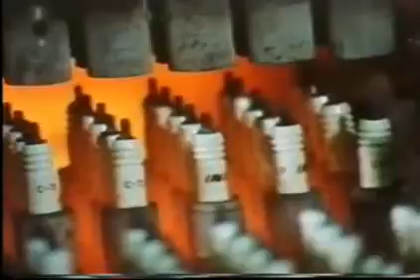The manufacture of parts by sintering powder compacts is one of the fastest growing production methods in the industrial world today. It offers unique advantages in economic shape forming and is applicable to virtually any material derived from a mineral source which can be prepared in a free-flowing form. Such materials include metals, metallic oxides, carbon, clays and glass.

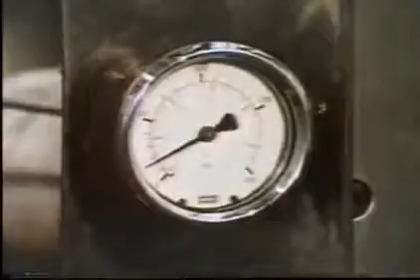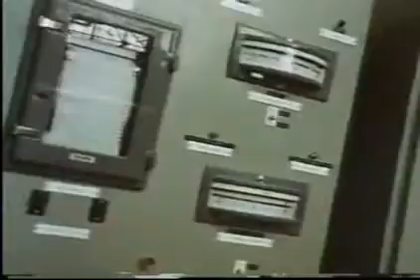Powder compaction is probably the most critical part of the process, since this is what determines the form, dimensions and quality of the fired component. No matter how precisely the firing cycle may be controlled, the kiln cannot produce a good sintered part from a poorly compacted powder blank.

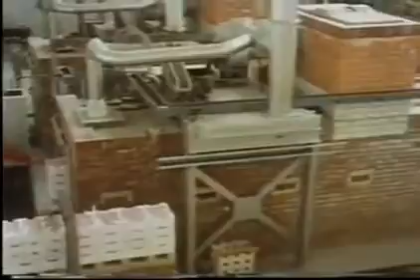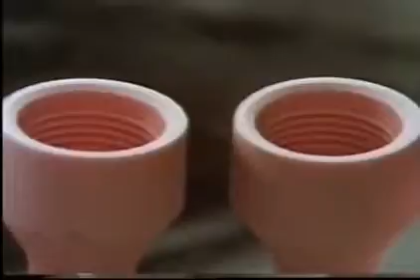Isostatic pressing techniques are now widely used to produce complex parts of more even consistency and density than are possible by other conventional methods. Isostatic pressing permits accurate formation of internal shapes, both plain and complex. It can reduce the need for drilling or turning and save valuable material.

The easiest way to explain isostatic pressing is to take the example of a bathysphere deep down in the ocean. Water pushes it with enormous force from all directions at once. An isostatic press reproduces the conditions found several thousand feet below the surface of the ocean in compressing any object placed within it. In this case, the hydraulic pressure is generated by pumps and so can be accurately controlled.

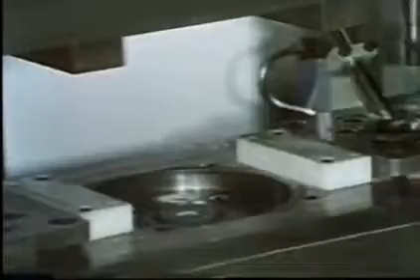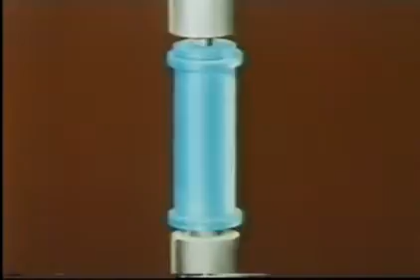Dry bag pressing has developed the isostatic principle for high output production. Essentially, this has been achieved by using a tool set which consists of matching steel and flexible components. This is in fact a custom-made tool set and pressure chamber for a particular compact. When sealed inside a pressure vessel, the tool set becomes an integral part of the system.

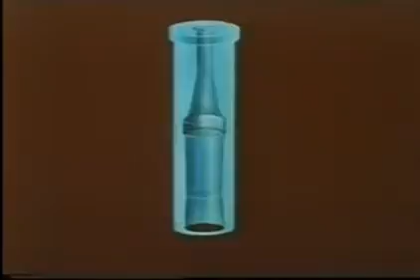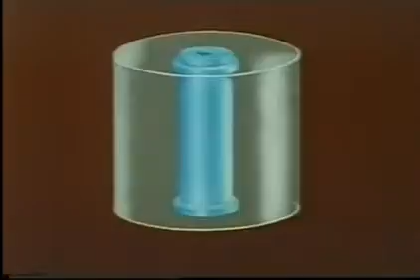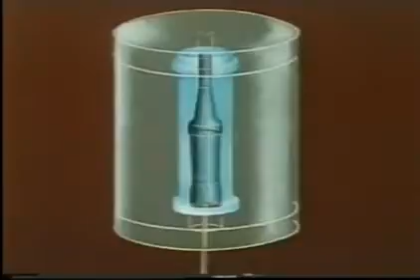At the center of the isostatic pressure vessel is the preformed flexible mold. It's designed to form a blank or piece part. A membrane is used to keep the flexible mold dry, and this assembly is contained within the pressure vessel. Top and bottom sealing caps in the form of the tooling are positioned to retain the mold assembly securely in the vertical plane. A pre-machined mandrel may be inserted where a compacted part requires an accurate bore form.

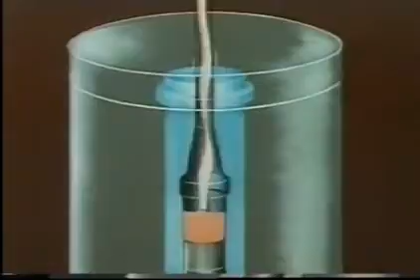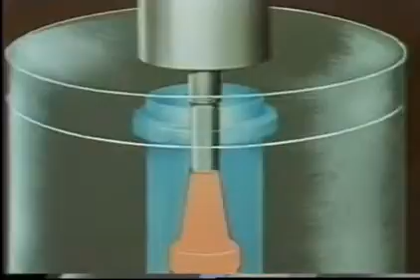A measured amount of powder is fed into the cavity over the mandrel. When the cavity has been filled, the top tooling comes into place to seal it. Fluid is pumped around the flexible mold assembly and is pressurized. As the pressure increases, the loose powder is compacted into a solid shape. The amount of compaction depends on how much pressure is applied and the type of powder used.

After a few moments, the pressure is released in a controlled manner. This speed of decompression is changed to suit different materials and compacted shapes. The loose, free-flowing powder is now a solid-shaped compact with a uniform density throughout.

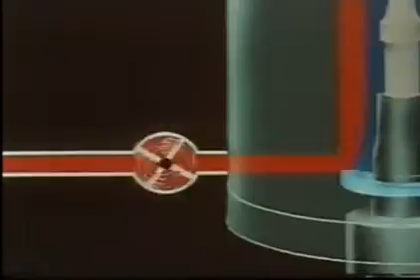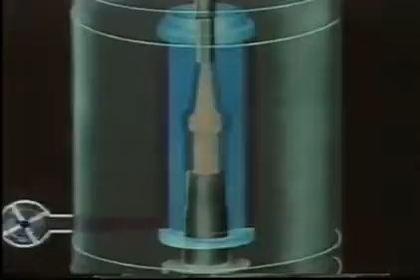Let's look at that again. The pressure is built up, allowed to dwell if necessary, and then carefully decompressed. The flexible mold moves away from the compacted part and resumes its original shape, ready for the next cycle. When the pressure is zero and the bag has totally regained its shape, the compact can be removed.

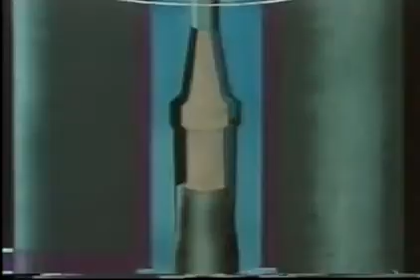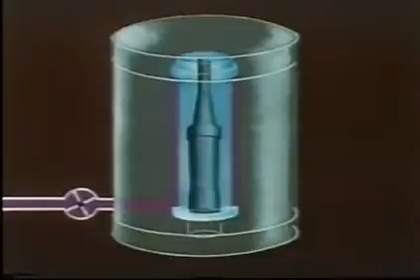The top tool is moved upwards in preparation for the next fill of powder, and the bottom tool is moved downwards, taking the compact with it. The compact can be removed from the tooling before it returns to the pressure vessel for the next cycle.

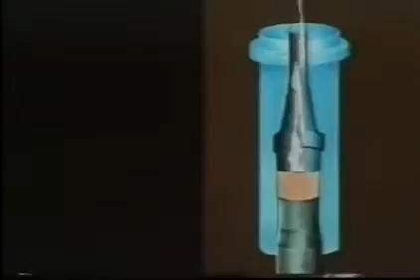The powder is the key part of the whole process. It must be able to flow quickly and evenly into the cavity. If it does not, the compacts will have inconsistent weight and dimensions. Worse still, if the powder clogs or bridges on the way into the cavity, no compact will be produced.

Different powders will compress by different amounts, resulting in different sized components. Depending on the natural characteristics of the powder, there may be a need to add binding agents to increase the component's strength after pressing.

Today, dry bag isostatic presses are built in a wide capacity range, for laboratory use through to high volume production, with consistently high quality compacts. Technical backup is readily available in the form of advice on their application, tooling to realize this potential, and practical help to overcome any initial difficulties.

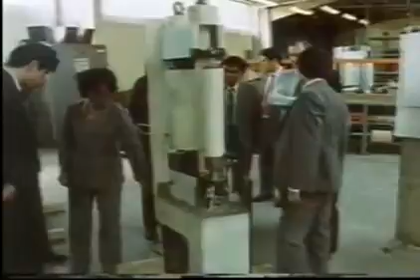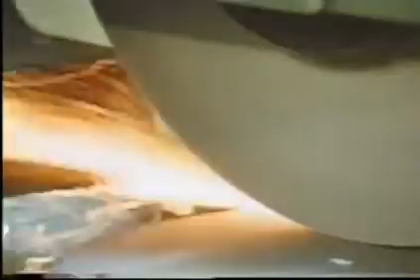The products for which isostatic compaction is used are probably more diverse than many people realize. As more and more engineers learn to appreciate its potential, new applications for isostatic pressing are being researched continuously to produce ever-widening ranges of different products.